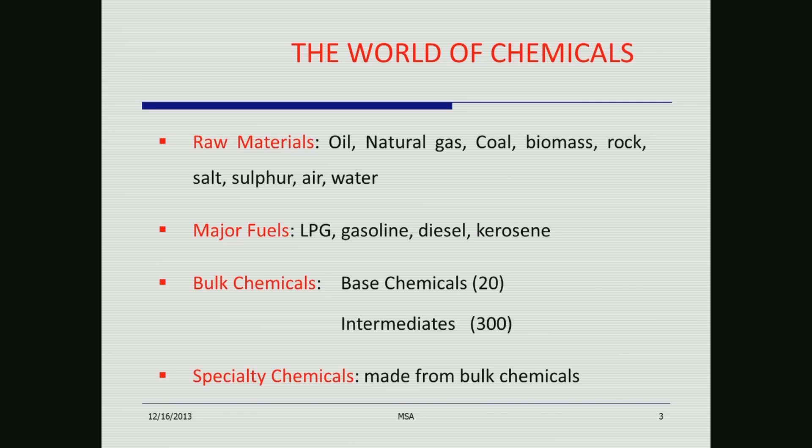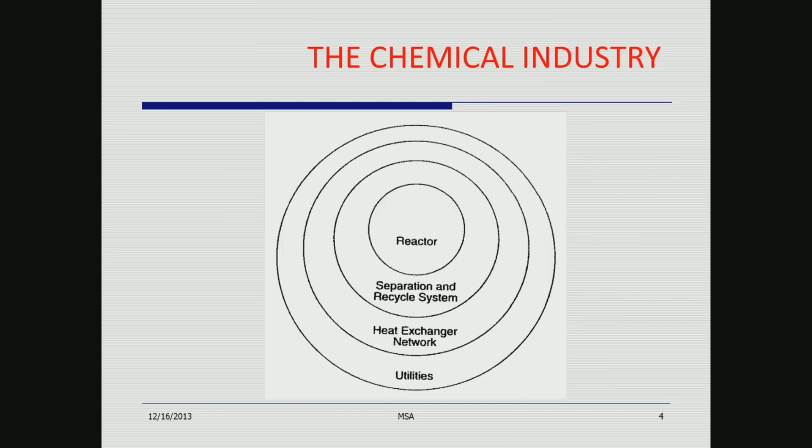The chemical industry basically consists of a reactor usually at the core, a whole lot of separation and recycle systems, heat exchanger networks and utilities. This is broadly the picture of the chemical industry. And after the reactor there are the separation processes, and I have to tell you something about separation processes, because industrial separation processes can be divided as shown in this picture roughly.

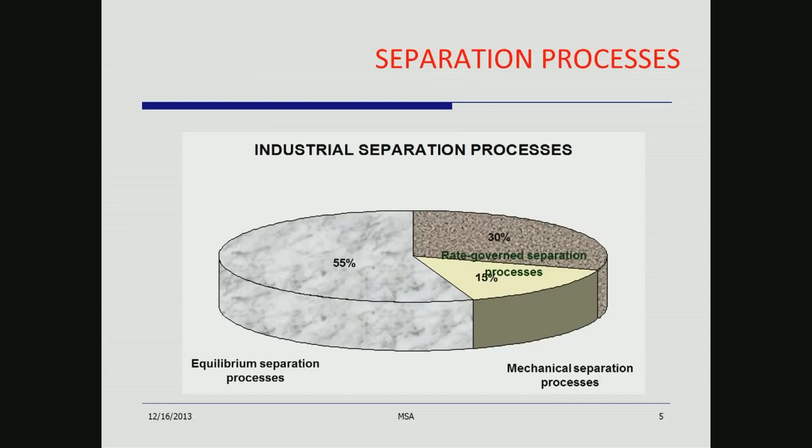You have equilibrium separation processes, which constitute about 55% of the total, and then you have 30% rate governed separation processes, and you have mechanical separation processes in the balance. The equilibrium separation processes can be basically designed on the basis of thermodynamics itself. Thermodynamics deals with equilibrium, and many of these processes operate so close to equilibrium that you can make quantitative predictions with thermodynamics.

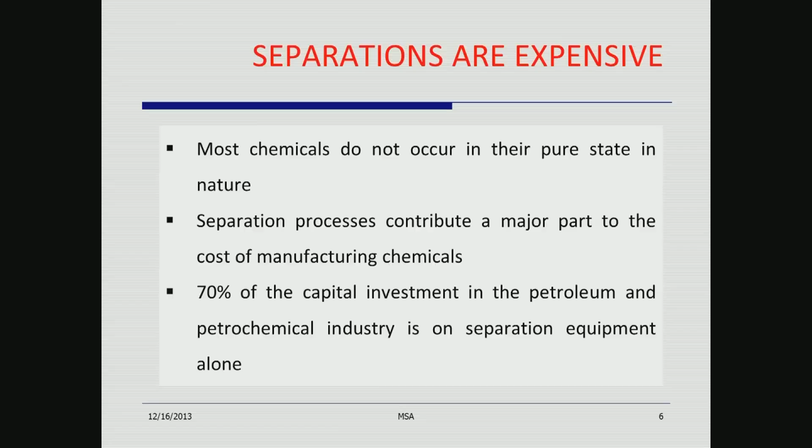The point is that separations are expensive. Most chemicals do not occur in the pure state in nature. So, separation processes contribute a major part, and 70% of capital investment, it is estimated, in the petroleum and petrochemical industry is on separation equipment alone. Now, that is about the chemical industry.

About thermodynamics, thermodynamics is a subject with extraordinary width of applications. You can ask questions as diverse as how tall can trees grow, how old is the universe, and so on. Thermodynamics has a supervisory, often intangible role in engineering. It sets the boundaries of design. Fundamentally, it will tell you what is the maximum possible thing. For example, what is the maximum work you can extract from a system, or what is the minimum work you have to put in order to produce a change of state.

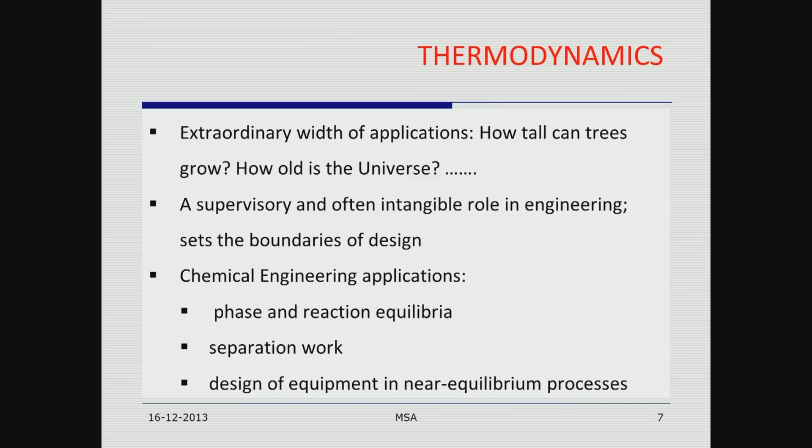And in chemical engineering, the applications are in phase and reaction equilibria, in calculating separation work, and in design of equipment in near equilibrium processes. The 55% separation processes are practically designed on the basis of mass balance, energy balance, and just thermodynamics.

Now, the perfection of classical thermodynamics. I do not know if you have seen this book by Lewis and Randall on thermodynamics, one of the best books available. It is an old book; the revised edition is by Pitzer and Brewer. But if you look at the preface, G.N. Lewis says, when you visit an ancient monument, you see only the perfection of the completed whole. Enter such an edifice that is still under construction, you realize that these great structures are but the result of giving to ordinary human effort a direction and a purpose.

I think the point that Lewis makes is that thermodynamics as a subject appears so complete, and the completion itself gives it a perfection. It's sometimes a little frustrating for the novice, because it seems as if you are drawing conclusions out of nothing. But I think it is nice to go back to the masters who gave direction and purpose to the edifice called thermodynamics and ask what did they contribute. In some sense it is nice to have a sense of history of the subject.

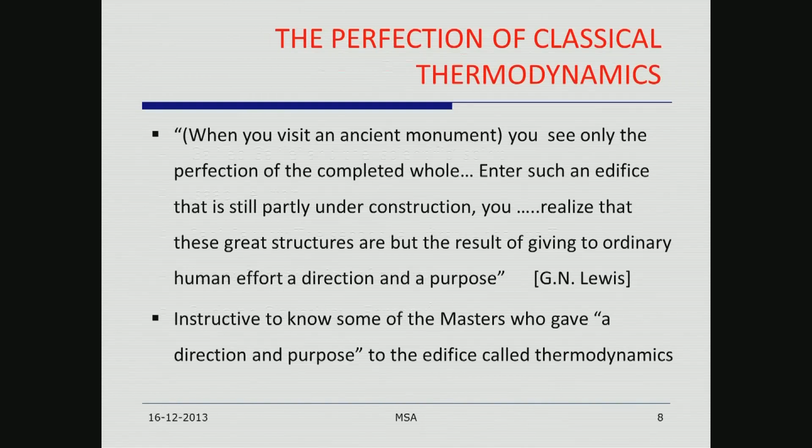So let me start with a few of these people. Galileo Galilei must be recognized as the person who introduced in effect the scientific spirit. He said you not only have to collect data, you have to then use your right brain to arrive at conclusions, far-reaching conclusions, and then when you hypothesize, you have to also verify experimentally, because a lot of your imagination of the right brain is often wrong. Of course, Galileo did not talk about the right brain, the left brain, but in our context we can explain what he said in these terms.

Isaac Newton, of course, was the one who essentially, as far as thermodynamics is concerned, introduced the concept of work and told you how work is calculated. Sadi Carnot is a rare case of an engineer contributing to fundamental science. The second law actually came before the first law, and Sadi Carnot introduced the idea of absolute temperature. Then there was Joule, who introduced the conservation of energy in a very rigorous form. I will say a few words about each of these people. And Rudolf Clausius, who introduced the word entropy.

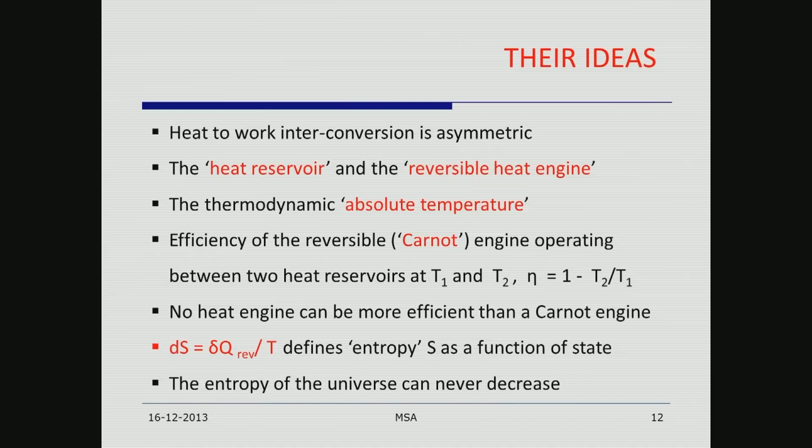He is supposed to have demonstrated this in front of the Royal Society again and again, till the members of the Royal Society were absolutely convinced. They did not want any more persuasion, but Joule insisted on doing it in several ways. But he essentially showed that heat and work are equivalent, and the internal energy is a function of state. The internal energy of the universe is a constant. Of course, the internal energy he defined as the difference between heat and work. We will give you a more precise definition as we go along, and he pointed out that the internal energy of an isolated system is a constant.

Lord Kelvin was one of the greatest supporters of Joule. Lord Kelvin came from the aristocracy, whereas Joule was an ordinary citizen, and this support was very valuable. But Lord Kelvin is known to be embarrassingly self-confident. There is a story that he wrote the tripos, and he sent one of the attendants to go look up the results of the tripos, and said, find out who is second. And the attendant seems to have come back and said, Lord, you are second. He was very confident that he was going to be the first ranker. Somebody else had to be second. But he provided a lot of support to Joule in the Royal Society in those days.

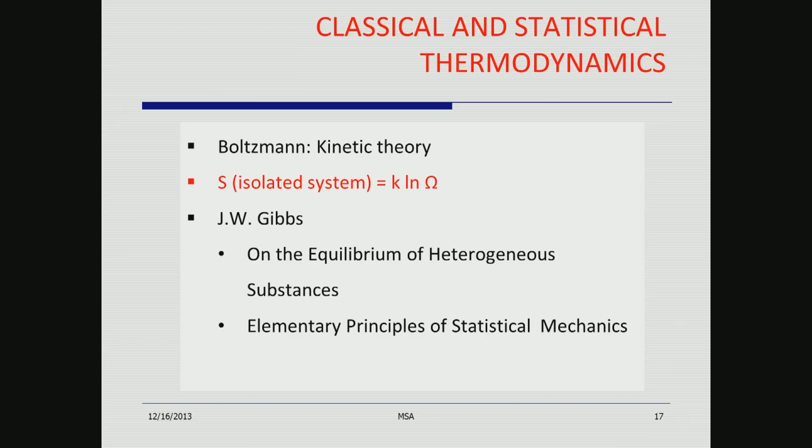So basically, classical thermodynamics is essentially two laws. The energy of an isolated system is a constant, and the entropy of an isolated system is ever increasing. The equivalent statement is that the internal energy U and the entropy S are functions of state. We know other functions of state like pressure, temperature, composition, volume, and so on, but these two were introduced because of the two laws of thermodynamics. Once these are introduced, the rest is practically calculus. You can derive all the results in thermodynamics through calculus.

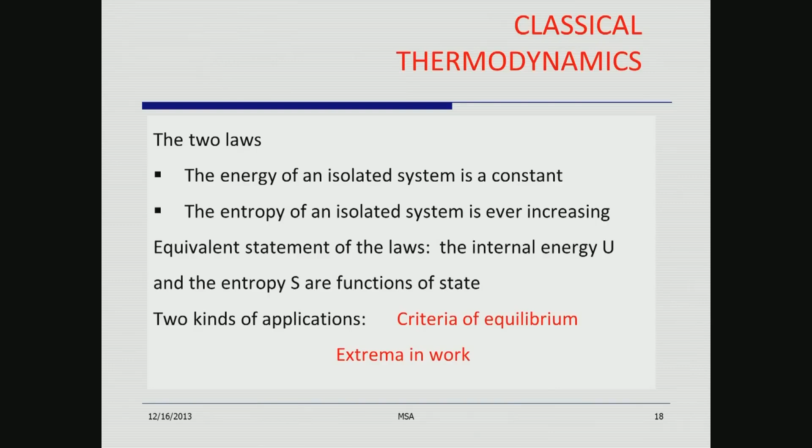Essentially, chemical engineers are interested in two kinds of applications: one is criteria of equilibrium and the other is extremum work. Let me talk a little bit about closed systems, the combined form of the two laws; we will see these in more detail as the course unfolds, but I am giving you an overview here. We are going to conclude that the change in internal energy dU is less than or equal to TdS minus delta W.

The conventions for work and heat here are: heat is positive if it is added to the system, work is positive if it is done by the system. The modern convention is actually the other way around. So the signs of delta Q and delta W in this presentation and most of the course will be the opposite of most of today's books. But it is a trivial difference, because in terms of measurable quantities the equations will be the same.

In isentropic processes you can show that the maximum work you can get when a system changes from one state to another is equal to minus the change in internal energy, and minus W, the work done on the system, the minimum work to produce a change of state, is equal to delta U. In isothermal processes we will show this is equal to the free energy change delta A. For PVT systems, delta W is PdV and the equilibrium criterion becomes simply U is a minimum at constant S and V, because you can rearrange that first equation.

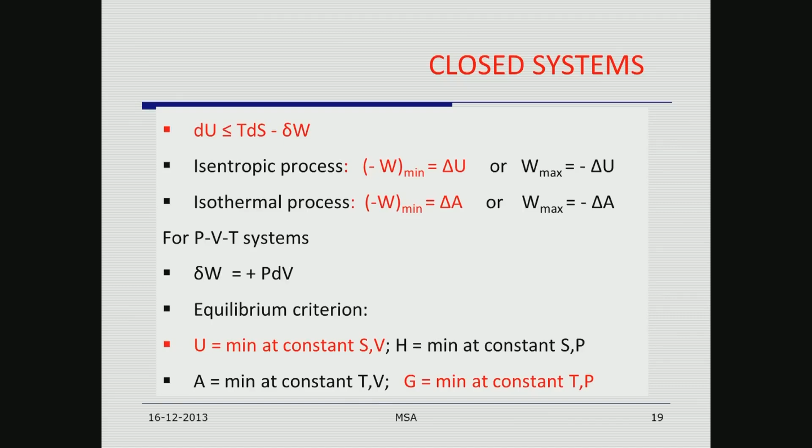Then at constant S and P, similarly H should be a minimum, and G will be a minimum at constant T and P. It is clear that because temperature and pressure, temperature and volume are the pairs of variables that can be held constant easily, you can monitor these values. So, A being a minimum and G being a minimum are the important equations.

If you look at open systems, you have to subtract off flow work. So, you redefine shaft work or useful work as delta W plus what I have written there, and if you put that in, you can ask what is the minimum work you have to do in a flow process. In a steady adiabatic process, you get the result that minus delta Ws by delta M is equal to delta H. Similarly, in steady isothermal operation it is equal to delta G.

Now, this is also valid for systems with negligible hold up, and in a chemical plant, for example, if you take a whole plant where raw materials enter and the products leave at ambient temperature and pressure, no matter what happens inside the plant, you can calculate simply the delta G between the products and the raw materials, and this is the minimum work you have to do. Of course, the actual work will be much more, but it is remarkable that thermodynamics is able to make such predictions while not paying attention to the details.

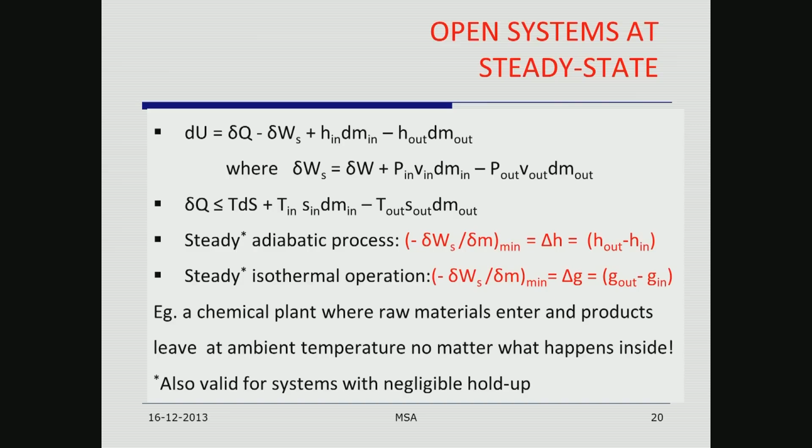So, let me show you an example. This is an example of an undersea portable device. I have a tank 1 and tank 2. This can be used, for example, for working on the hull of ships, and this is a portable device which is carried on the back of a diver, and you can ask how much work can this do. What you have is air in tank 1 at very high pressure which expands into tank 2, because you are talking of pressures under the sea and the pressure can be quite high, even at 10 meters. So, what you do is always have an evacuated tank which is much larger, into which the air expands, and in doing so it does work Ws.

You can ask what is the amount of work done. So, I have given you some example. Tank 1 you start at 50 atmospheres, tank 2 is at 1 atmosphere at T equal to 0, and you allow the air from tank 1 to go into tank 2. The volume of tank 1 is 5 liters, and tank 2 is 50 liters. And you can ask, when it comes to equilibrium, what will be the final pressure. You can show that the pressure is 5.43. The operation is isothermal because the whole thing occurs underwater at a particular depth and the temperature is constant effectively.

So what you can do is calculate therefore the maximum work. Maximum work according to thermodynamics is delta A, and you are talking of m1, the mass of air in tank 1, having a change delta a1, that is a specific Helmholtz free energy small a, and m2 delta a2, that is the gas in tank 2. The second part is compressed, the first part expands. So you have a net work done of 46.9 kilojoules.

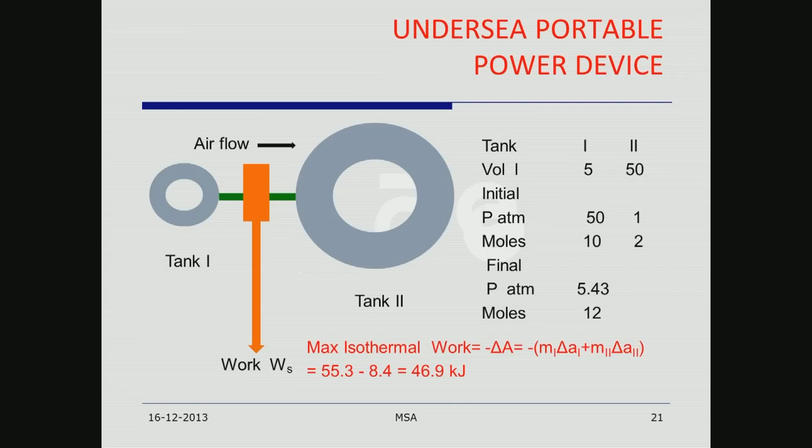What we are really looking at is mixtures in chemical engineering thermodynamics, and you have to start with the basic laws for dG, because the Gibbs free energy is the most important variable. Typically chemists deal with closed systems and they use A, the Helmholtz free energy, as a very important variable, and chemical engineers deal mostly with flow systems. So we are looking at G as the most important variable. The Gibbs free energy dG is simply minus SdT plus VdP plus sum over mu i dNi.

You are looking at it as a natural function of temperature and pressure and mole numbers, and the change in G with respect to Ni at constant T, P and other mole numbers is a variable that will appear again and again. It is called partial molal property Gi bar. It is given a name, chemical potential mu i.

Mu i has other definitions, but basically you can take the first equation dG equal to minus SdT plus VdP plus sum over i of mu i dNi, and if you are looking at a process at constant T and P, and because mu i is an intensive variable, if you look at changing G from a system with n moles to k times n moles, you actually get this result by integrating the first equation.

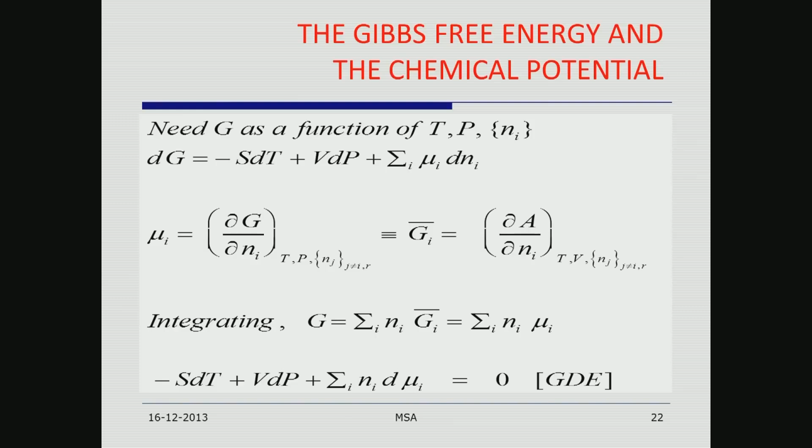It was Gibbs who pointed out that chemical potential is actually the natural variable for discussing thermodynamic theory, not composition. But like the composition variables, the mole fractions for example, out of r only r minus 1 are independent because there is a constraint that sum over xi is equal to 1 or sum over dxi is equal to 0. An equivalent equation can be derived for the chemical potential, because chemical potential is given by this equation from calculus, and you can re-express the Gibbs-Duhem equation by substituting this

for d mu i, and you get a simple result that the sum over i of xi d mu i by d xj is equal to 0 for every j equal to 1 to r minus 1. So you have a total of r minus 1 equations for r chemical potentials in any given phase. Therefore there is 1 degree of freedom. You can therefore guess the composition dependence of the chemical potential of one species, and then all the others are determined by the Gibbs-Duhem equation.

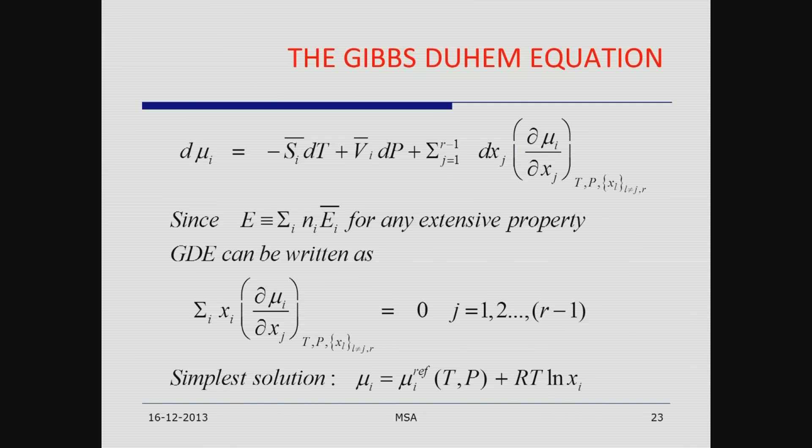The simplest of these solutions is mu i is equal to mu i reference plus RT ln xi, and if it is valid for the whole range of compositions, then when xi is equal to 1, mu i reference becomes the chemical potential of pure i. So as I said, the Gibbs-Duhem equation has r unknowns and r minus 1 equations, so it has no unique solution. The central problem then is to build models for any one chemical potential.

Instead of doing it for one chemical potential, you try and do it for delta G mix, because delta G mix is simply the free energy change due to mixing of components. After mixing the Gibbs free energy is sum over all i of xi mu i, and before mixing it was all pure substances, so it is xi mu i pure, and delta G minus delta G ideal is called G excess. So if you can make a guess for Gxs, you can calculate the chemical potentials; for example, in a binary, the chemical potential mu1 is simply delta G plus x2 times partial of delta G with respect to x1,

and this is formally written as mu i pure plus RT log gamma i xi, where gamma i represents the non-ideality, and RT log gamma 1 is Gxs plus x2 partial of Gxs by partial x1. So this way all you have to do is guess what Gxs or delta G of mixing is. There are various models for this because you have complete freedom. Only thing is the model you propose has to give results that agree with experiment for a large number of systems, then it stays in the literature, otherwise it is forgotten.

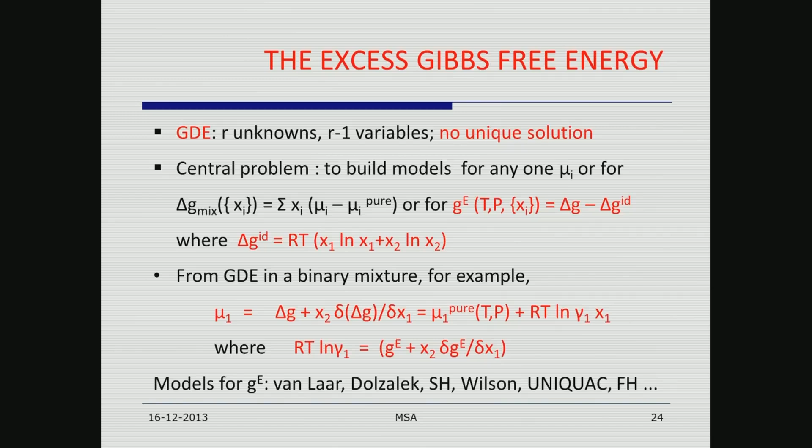So the models, for example, Van Laar, Dolezalek, these two are classical thermodynamic models, the others are all molecular models. You have various models like Wilson, UNIQUAC, Scatchard-Hildebrand, the Flory-Huggins model, and so on. So basically what you are looking at is bounds for work. You have to calculate the change in the thermodynamic properties, either U or A, or the specific enthalpy or the specific Gibbs free energy. Of particular interest in separation processes is the free energy of mixing, as I pointed out already.

Delta G mix is delta H mix minus T delta S mix. All of the models normally try and calculate delta H or delta S, and then have a default option for the other. For example, you can say delta H is 0 and calculate the entropy of mixing, or you can say delta S mix is the same as the delta S of ideal mixture and calculate model delta H. Delta G ideal is simply RT times sum of xi log xi.

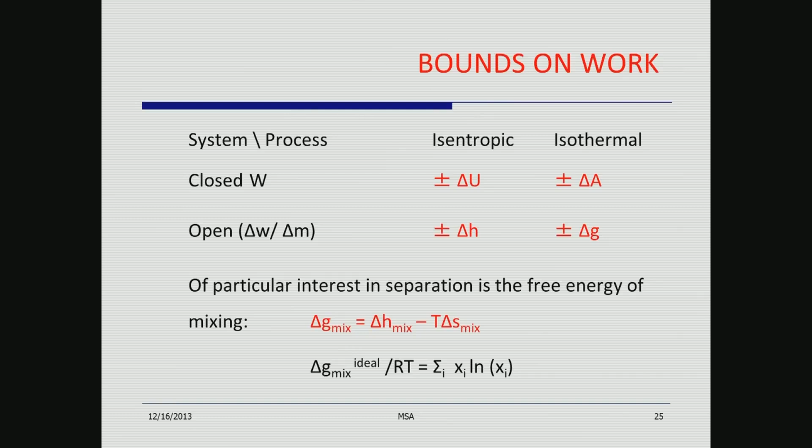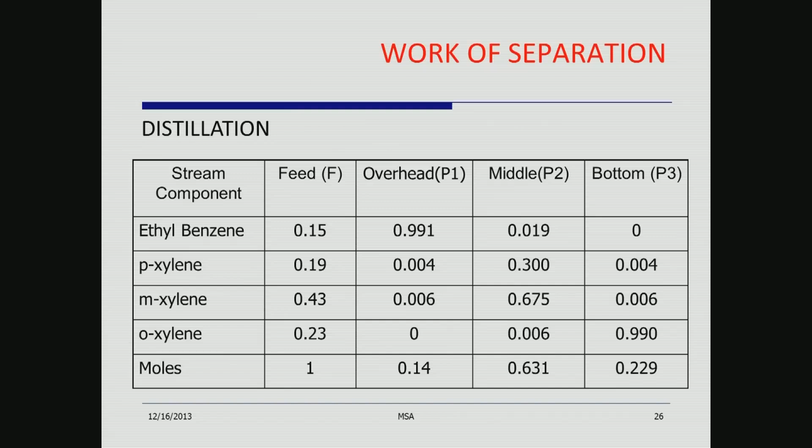Just to give you an illustration, take work of separation. For example, you have, let us say, a distillation column in which you are separating ethyl benzene from the 3 xylenes, para, meta and ortho, and I have a certain feed, I have a certain overhead composition. In a distillation column I have a middle composition and a bottom composition. The question is how much work is required for this.

Now, the minimum work that you have to put into the system is simply G of the products minus G of the feed, and in this case there are 3 product streams. So, delta G of P1 plus delta G of P2 plus delta G of P3 minus delta Gf. You can write it in terms of delta G for each stream because the pure component free energies will cancel in any case. So, delta G ideal in this case turns out to be 2.86 kilojoules per mole.

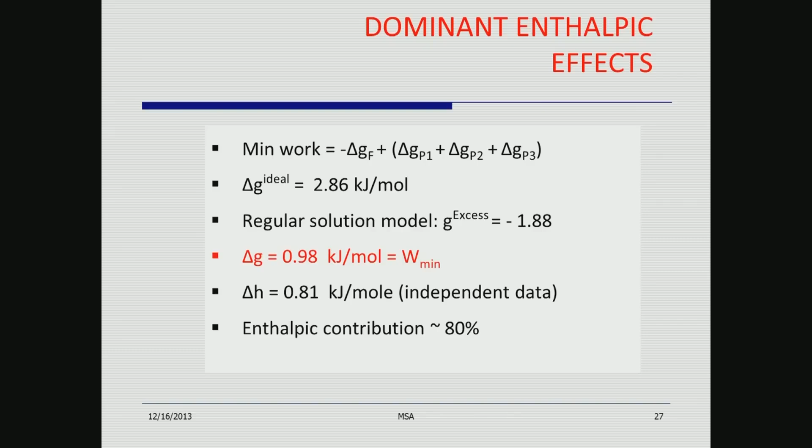If you use a regular solution model, you will learn all these models later in the course, you can show that gives you an excess free energy of minus 1.88. So, net delta G is 0.98, which is the minimum work that you have to do. It should be minus W within parenthesis, then minimum, because it is work done on the system. Now, delta H is 0.81, so the enthalpy contribution is approximately 80%. This particular case that we discuss is an example of a dominant enthalpic effect.

Now, if you look at work per mole, minus RT times x1 ln gamma1 x1 plus x2 ln gamma2 x2 represents delta G, and it is the minimum isothermal work to be done to separate 1 mole of a binary mixture into x1 moles of component 1 and x2 moles of component 2. Of this, minus RT ln of gamma1 x1 is the work needed to produce 1 mole of the substance from its naturally occurring state of composition x1.

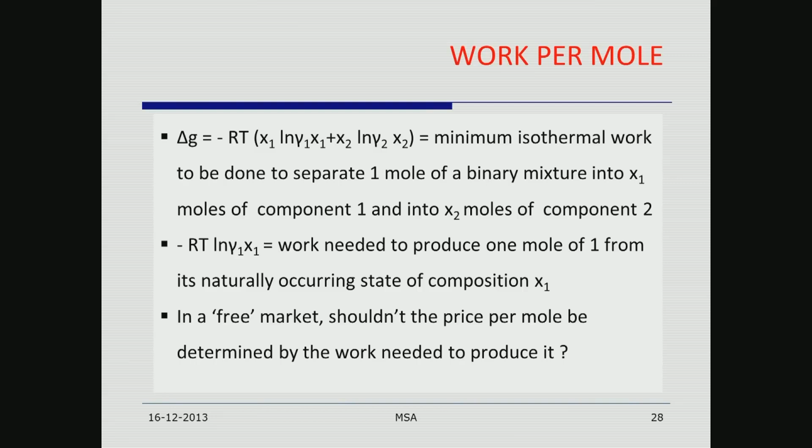Now, in a free market, you would expect that the price per mole be determined by the work needed to produce it, and I will give you an example of a plot. This is from Judson King, the classic book of 1970, and he plots log of the price in dollars per pound against log of the weight fraction. It should be mole fraction times the activity coefficient, but as a crude approximation you can use the weight fraction, and if you make a plot you get a remarkable straight line.

The two data are from completely different sources. The one is the market price and the other is the log of the weight fraction as it occurs in nature, and this approximately calculates the work required. So, you can see that the thermodynamic work required correlates very well with the price. The slope of this will depend on several factors including the economic conditions, the wages and so on. Now, it is a free market, so everything falls in place.

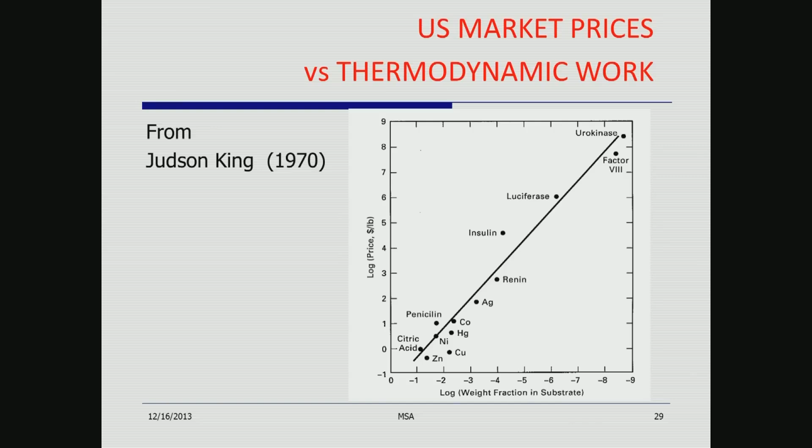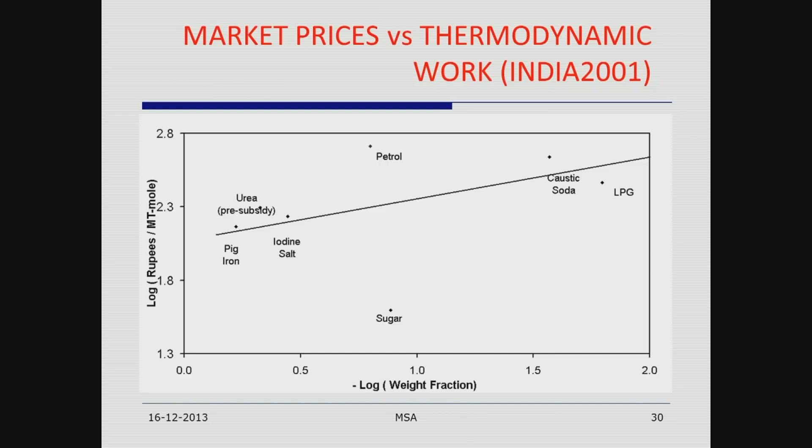Look at some data for India that we plotted. This is 2001 data, it is old data but it still gives you a flavor. You can see that petrol is much higher, that is artificial because you have an excise duty on petrol, and you can see that urea pre-subsidy is right bang on the line. The actual price of urea is much lower in order to get the vote of the farmers, and to make it available for the farmers the government makes it available at much lower prices. Sugar again is a political decision to subsidize sugar, and so you get sugar at much lower price than the work warrants.

So, criteria of equilibrium, I want to say a few words about the other aspects of thermodynamics. At constant T and P, thermodynamics will tell you that G should be a minimum, and G is sum of Ni mu i. You can write it in terms of activity coefficients, and the activity is either gamma i xi if it is a liquid mixture, or P yi times phi i if it is a gaseous mixture.

It is different ways of expressing the non-ideality, and by asking that delta G be equal to 0 for equilibrium, you actually come to the conclusion that RT ln K, where K is the equilibrium constant, is equal to minus delta G reference. The reference state should be chosen judiciously, and finally for phase equilibrium you can show that the chemical potentials in two phases of the same substance should be equal at equilibrium.

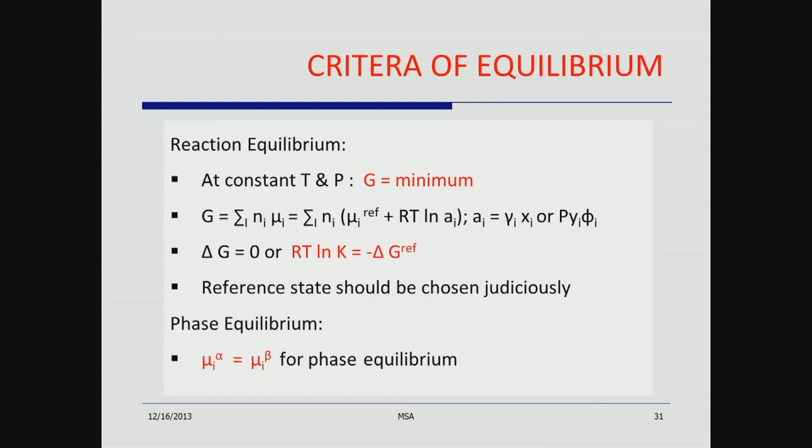For example, let us take a very simple example. Almost all the ores appear as sulfides or oxides. In the case of zinc, it is zinc sulfide. You roast it in oxygen, what do you expect to get? You can show that you expect essentially zinc oxide. The possible reactions are listed there. Zinc sulfide plus oxygen will give you zinc oxide plus sulfur dioxide, and the delta G0, the free energy change in standard state, is minus 280.

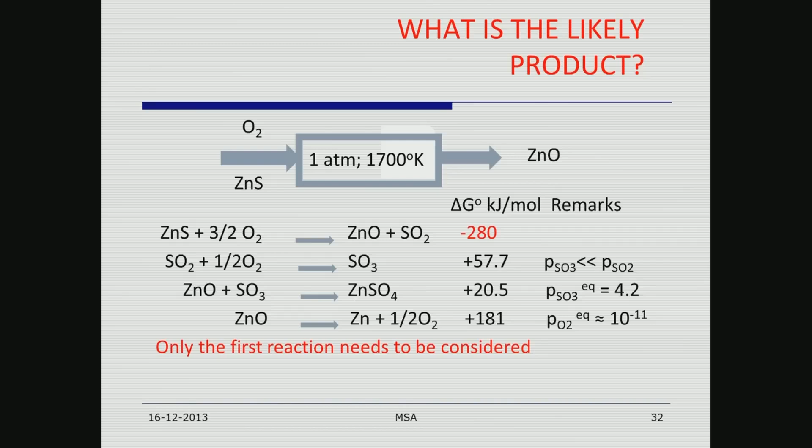Look at all the others: sulfur dioxide going to sulfur trioxide, zinc oxide plus sulfur trioxide giving you zinc sulfate, and zinc oxide giving you zinc plus oxygen. All of these are positive, and you can say only the first reaction needs to be considered, the product will be zinc oxide. So thermodynamics can tell you right away what to expect in terms of product. You can of course quantitatively calculate them.

The thermodynamic theory is so beautiful and so complete that it sort of gives you results of the same form in many contexts. If chi is a characteristic intensive property at equilibrium, thermodynamics will tell you how to calculate chi from one of the criteria that we already discussed. It will also tell you that the change of log chi with respect to T is given by an equation that says minus characteristic enthalpy change by RT squared.

Similarly, the change of log chi with respect to P will give you a characteristic volume change by RT, and the maximum or minimum work will be the change in the appropriate energy function. So this is a summary of results that you get in thermodynamics. They are always of the same form, and let me now pause and give you a molecular picture.

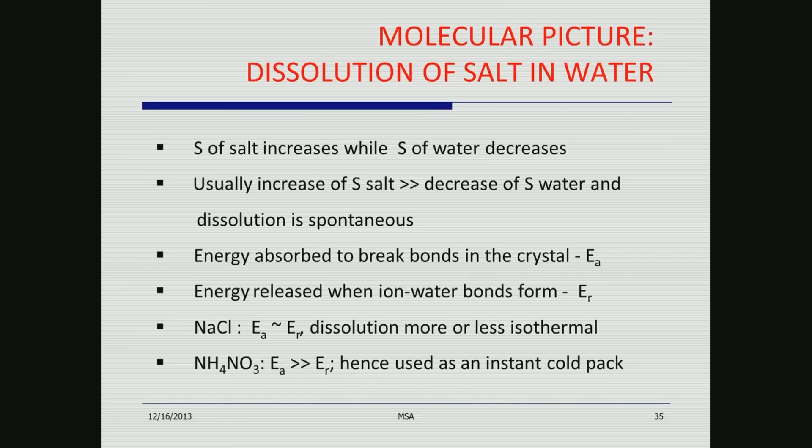In order to do this at a molecular level you have to break the bonds in the crystal, and this energy absorbed we will call EA, and the energy released when ion-water bonds are formed, let us call it ER. Now, the comparison of EA and ER will determine whether the dissolution is going to be accompanied by a temperature change. For example, in the case of NaCl, EA is approximately equal to ER and the dissolution is more or less isothermal. But if you take ammonium nitrate, EA is so much greater than ER that the resulting decrease in temperature is so significant, it is often used as an instant cold pack.

So, what molecular theory does for you is give you a mechanistic handle, and therefore most of the theories in thermodynamics for calculating property changes come from molecular theory. The classical thermodynamic theories are very few. As I said, I mentioned Van Laar and Dolezalek for calculating delta G, and they both came up with classical theories. We will discuss them in the course.

So, in summary, the whole purpose of this course is to help you calculate thermodynamic properties and therefore calculate changes in thermodynamic properties. It is these changes that are going to be very important as far as the chemical industry is concerned, because your prediction of both equilibrium and the maximum work that you can get from a system as well as the minimum work you need to put into a system are determined by these changes. So, I think that is the summary of the course. You can see that there is a relevance of thermodynamics directly to the industry.